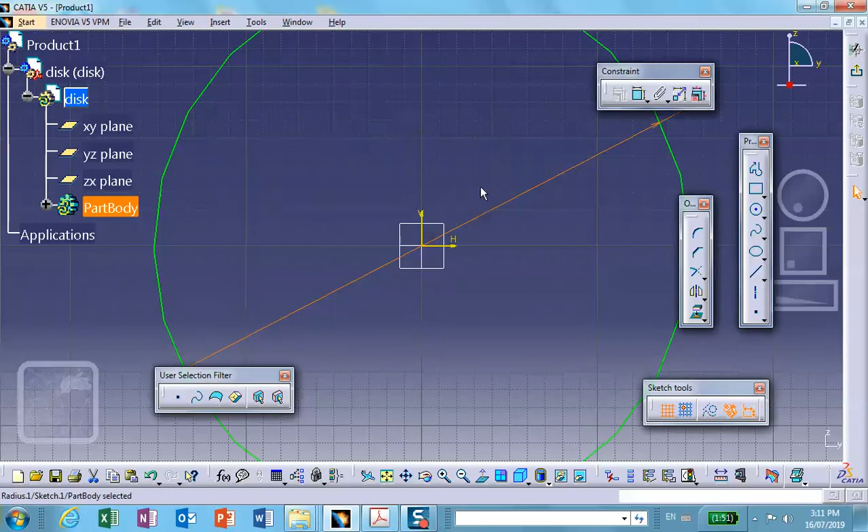And then we draw 3 circles here. This is the one in the center. The radius of all of these is 1. And another circle over there. And another one down here. We're going to position them in just a minute. Okay. And then this one is diameter 2. This one also, not that one. This one is also diameter 2. And so is this one. And let's put some dimension between the center of this and that line. That's going to be 6.

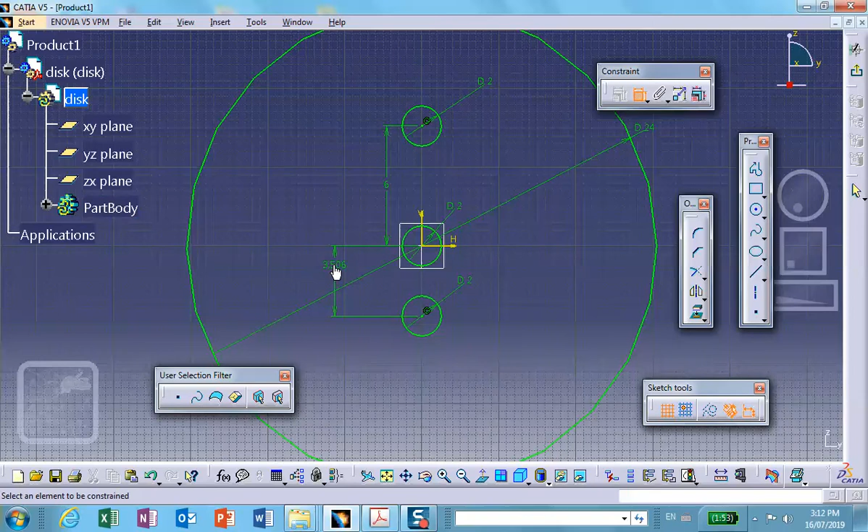Oh, I made a mistake. This diameter should have been 24 actually. Diameter is 24, radius is 12. Okay. Yeah, good. And then another one between the center of this circle and that guy is also 6. Okay, so this is supposedly that disc that you see there with 3 holes. So exit, pad it. The thickness you're told that it is 2 inches. So we make a mirror extent 1 inch in each direction, and that gives us what you want.

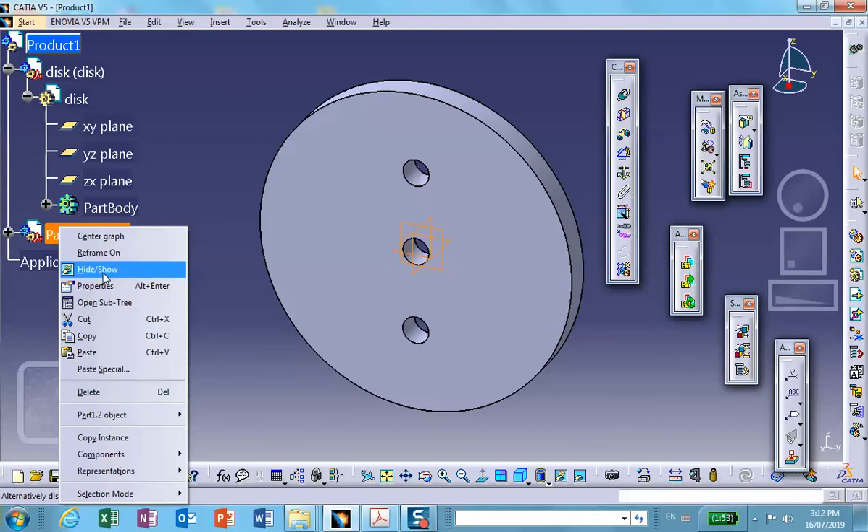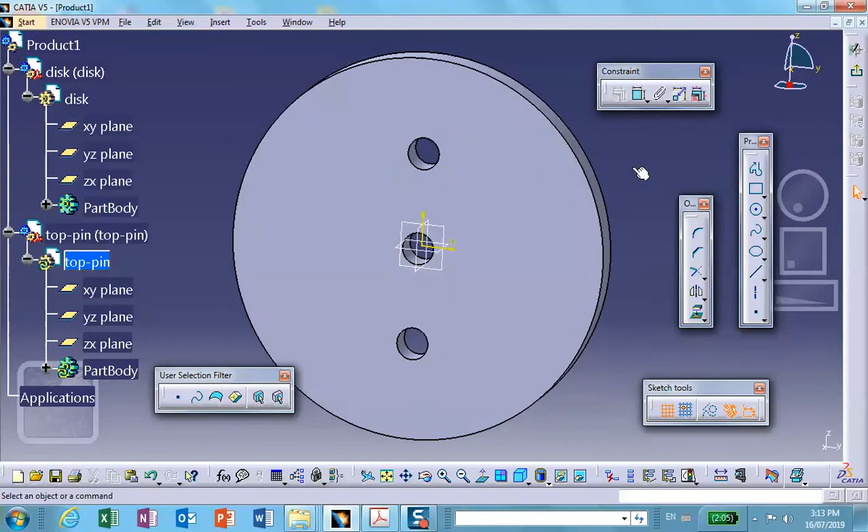Now I can insert a new part in there, and I'll call it the top pin. Right click, properties, top pin, and top pin. Okay, let's make it. So top pin, I'm going to project on that, let's see now, YZ plane. I will sketch, and project that circle. There we are. Exit, and then pad it symmetrically by 3 inches in each direction, so total of 6 inches. So that's 3 inches in each direction, and that's the top pin.

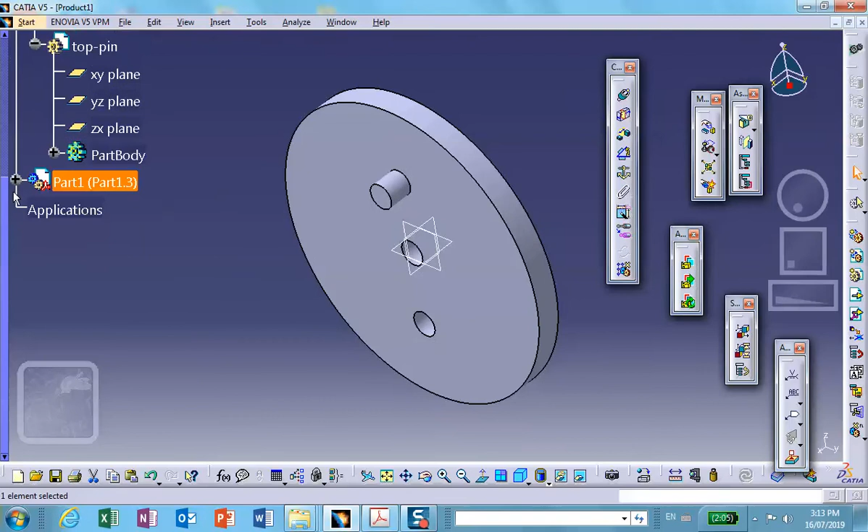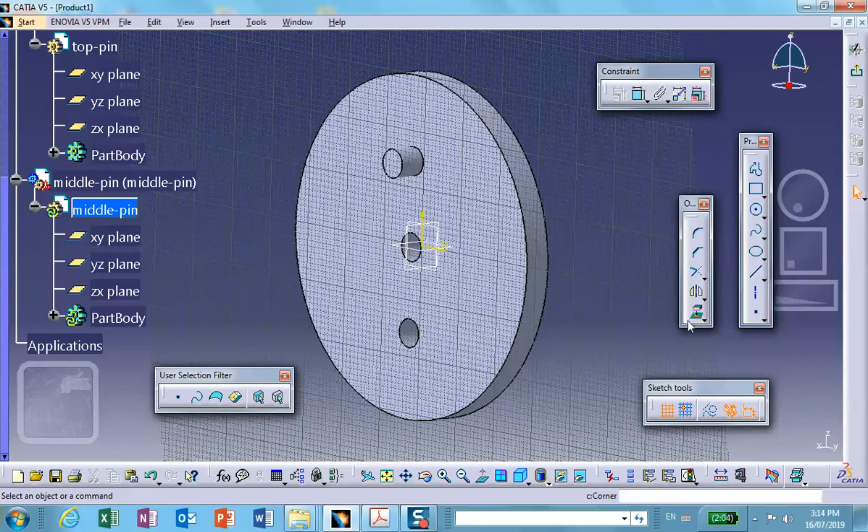Okay, now go back here, insert, new part. So no, of course you can use that pin by copying it, but I'd rather make it. Properties. I'm going to do the middle one, middle pin. Middle pin, and down here also middle pin. Okay, and make it. So go there on that same YZ plane. I will sketch. Repeat this process 3 times. This is ridiculous, but that's okay. Exit, pad it in each direction 3 inches,

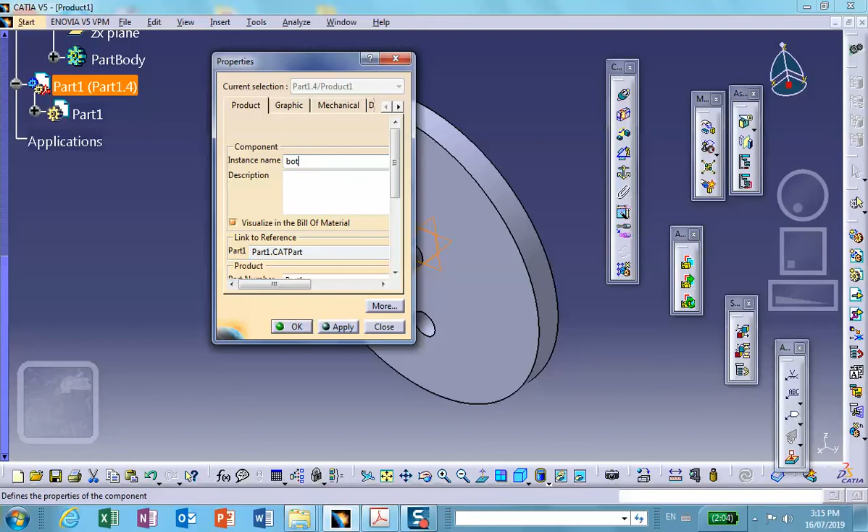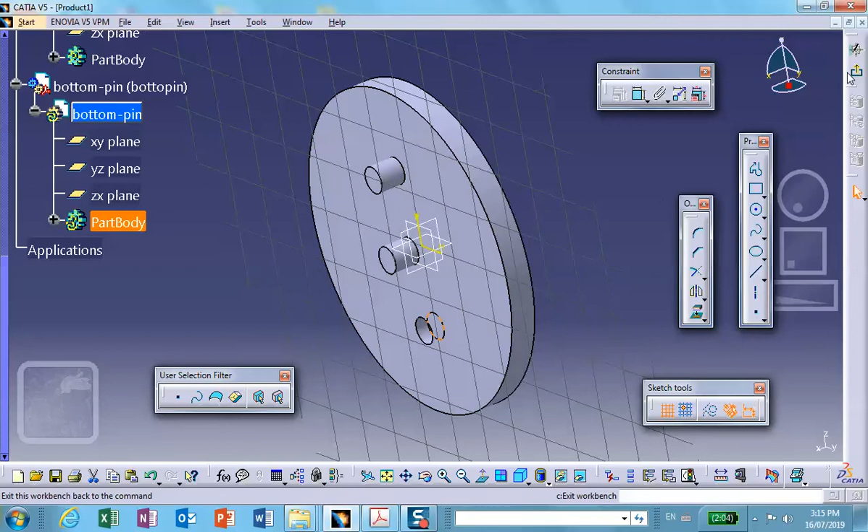and finally go up there, insert, new part, say no, and this is going to be the bottom pin. Right click, properties, bottom pin, and same thing down here, bottom pin. Okay, let's make it. So go in there on that YZ plane, sketch, project that circle, exit, pad it in both directions, 3 inches in each direction. So that's 6. Okay, let's go ahead and save this thing.

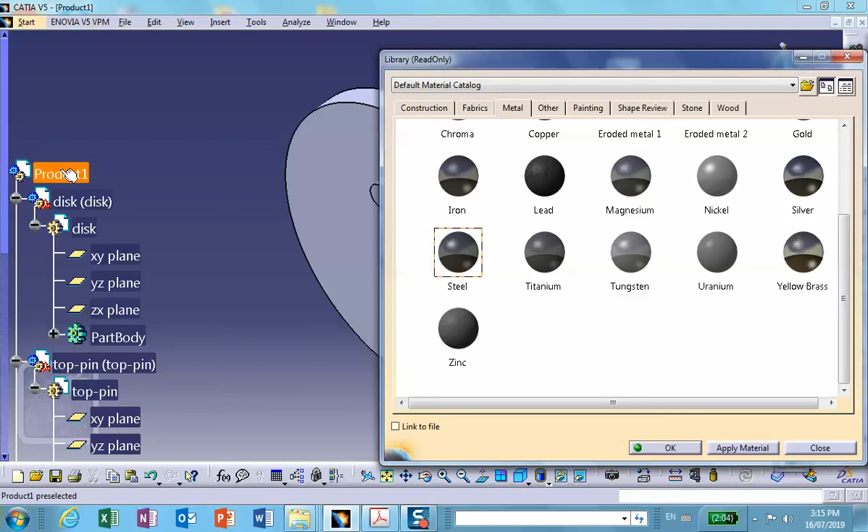By the way, this entire thing is made out of steel, so we go to assembly level. So apply material. Where is this? Apply material. Metal, steel, on the entire assembly. And okay. Now we're going to save this. File, save management, save as, desktop, new folder, assembly disk and pin. Disk, pin. Okay. And we say open and say OK, save and OK.

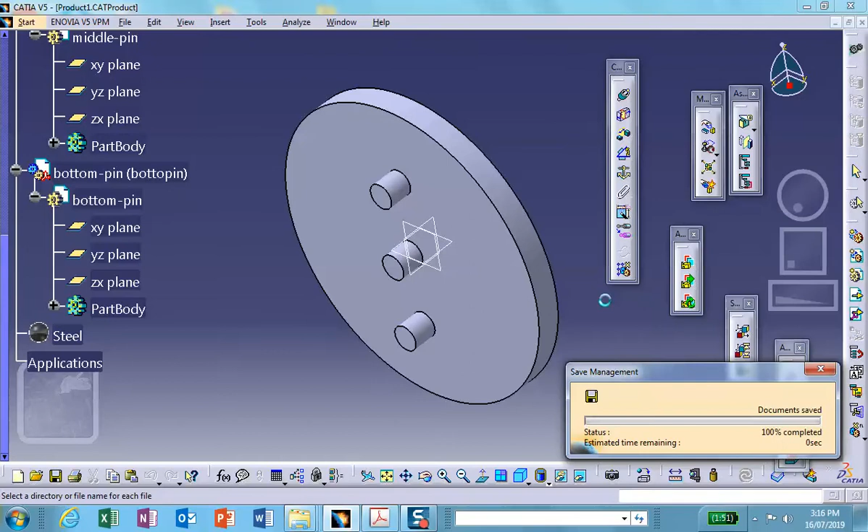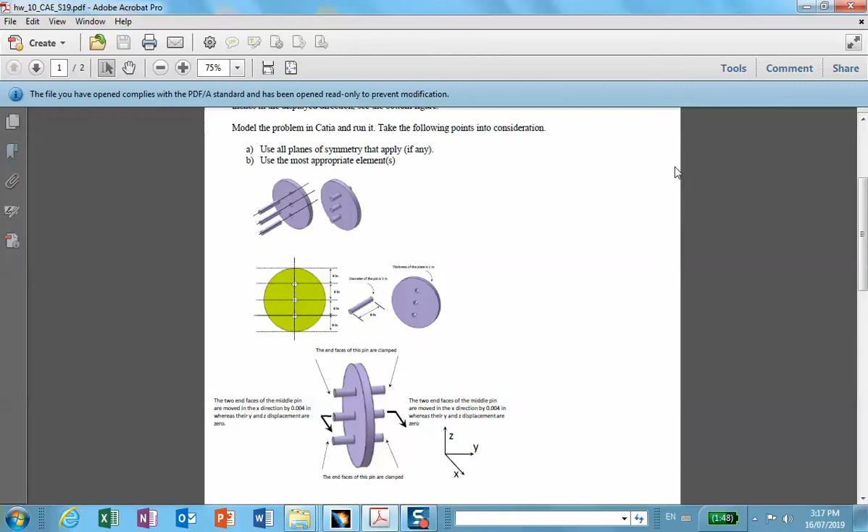Alright, now here's the situation. We are told that this top pin, the 2 ends are fixed, clamped, and the same thing with the bottom. And then we are taking the face here and the face on that side and pushing it in a certain direction, direction being direction X here, by some amount. Okay? So we obviously have planes of symmetry: both the YZ plane and the XY plane. See that? The amount of displacement is 0.004. Okay, so we have 2 planes of symmetry. Cutting it with the XY plane, and cutting it with the YZ plane.

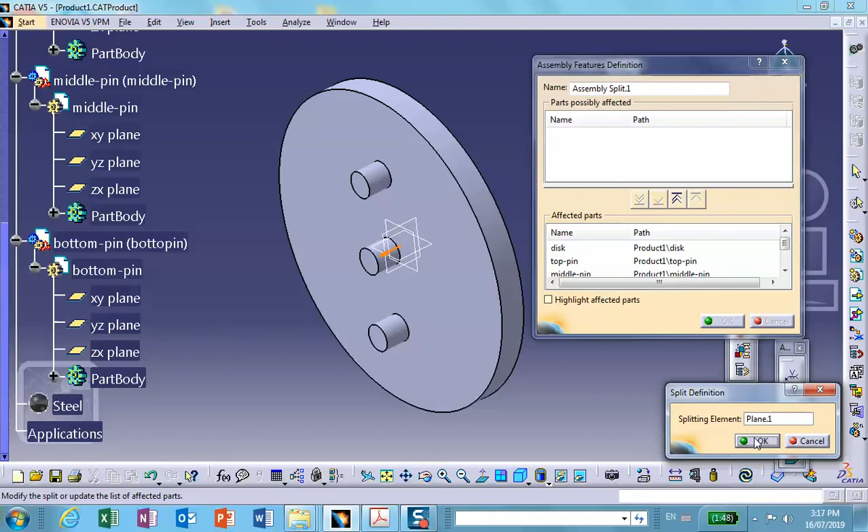Now we can do these simultaneously in the assembly while we're here. Click on the split, select the plane. It says these 4 parts are affected. Do you want all of them? The answer is yes. Which side do you want to keep? Okay, we keep that side. So this is the way it went. And then we also have to cut it with the XY plane.

Okay, so again the saw, split, this plane. It says these are all affected. Are you sure? The answer is yes. And if it doesn't work, of course you're going to fix it. So there we are. This is it. The top and the bottom behave exactly the same way. Alright, so let's save everything.

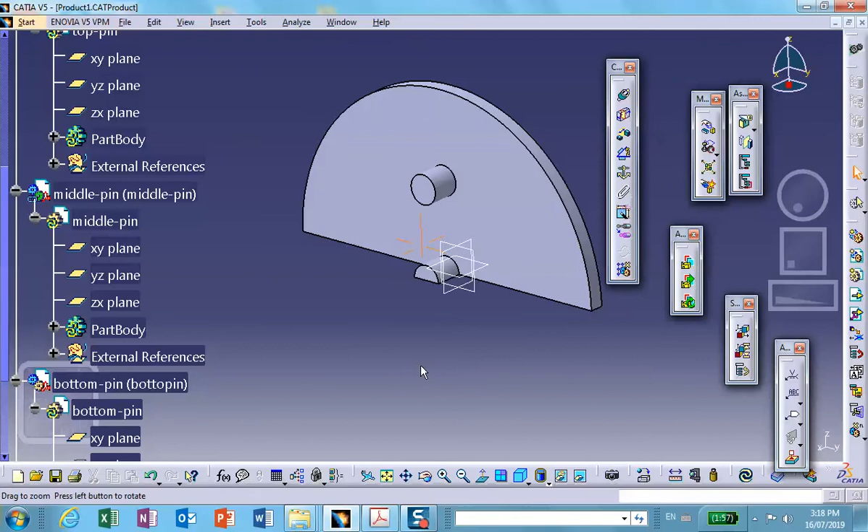Okay, we go to generative structure analysis. Catia immediately meshes these 3 parts. Now, of course, the disk itself is going to have a lot bigger element because of its size.

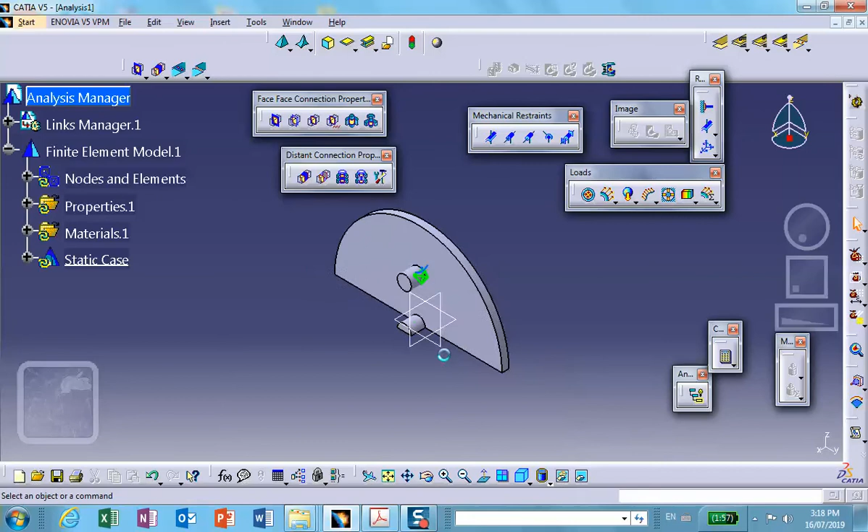I'm going to change that. Notice that this one is for the disk, I'll change this to be maybe 0.3 or 0.2, we'll see how it works. For the top pin, I'll make it 0.2 so you can see it better. The bottom one, let me make it 0.25. How about that, because I can't see it. Here 0.25, and this one 0.25. Okay, very good. So let's look at the mesh now.

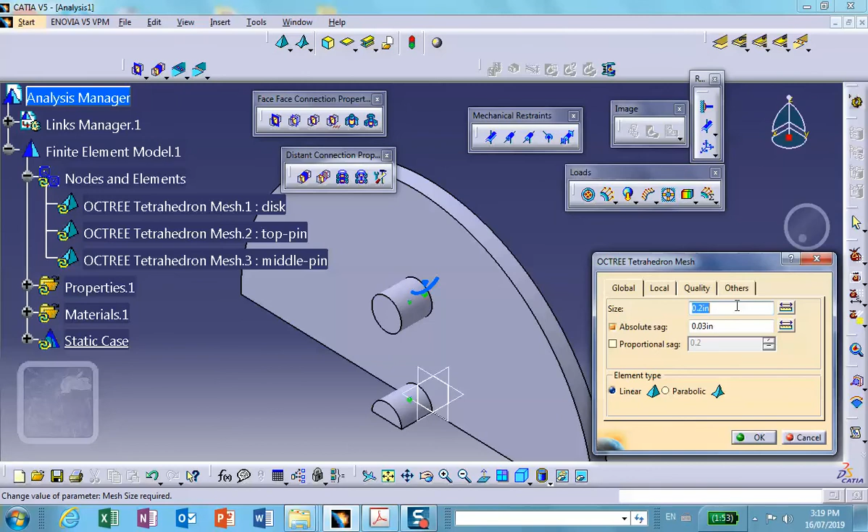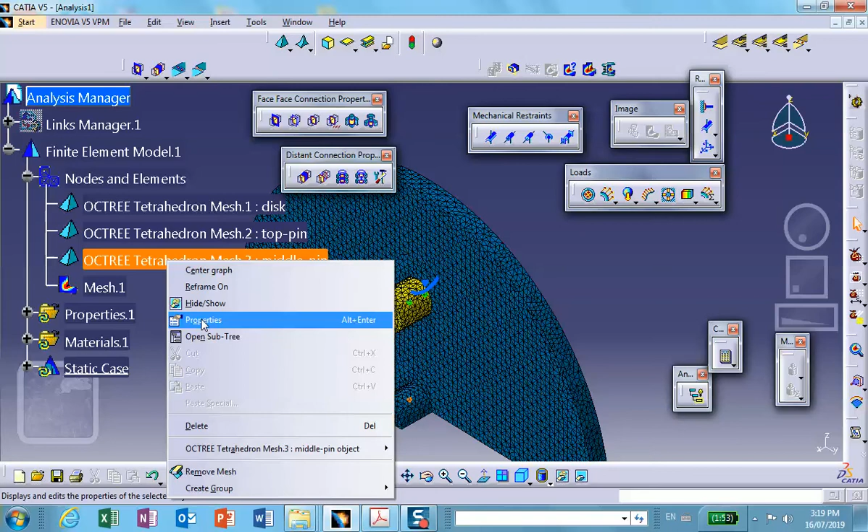Right-click Mesh Visualization. There we are. If you want different colors, go to Properties, Graphics. For example, for the pin, I'm going to make it yellow, and also for the other pin yellow. Properties, where the disk itself is kept at blue. I think these are too small, but our problems are simple, so we just leave it like this.

Okay, fine. Now deactivate that, and let's start putting our restraints. So this end is clamped.

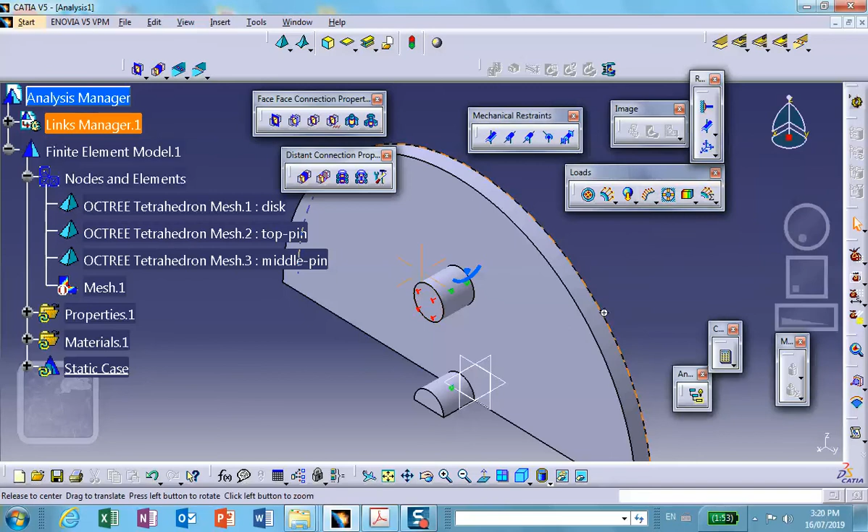Let's put our surface sliders here, planes of symmetry. This is a plane of symmetry, that is a plane of symmetry, and that is a plane of symmetry. And incidentally, this is a plane of symmetry, so is this, and so is that. So we took care of all planes of symmetry, no problem.

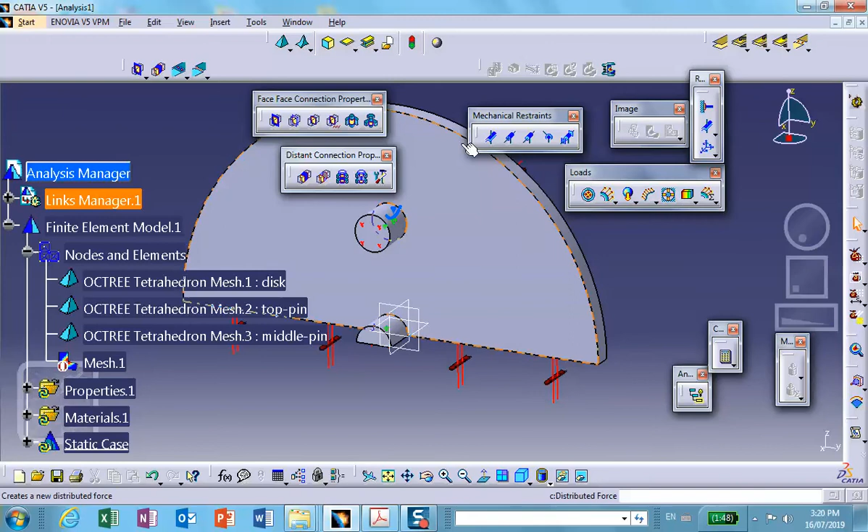Now we want to take this pin and push it in the y direction by 0.004 according to what the problem says. So we do a user defined restraint on that face, in the direction y. First you make it 0, and that's what this does, then you can change it. So enforce displacement on that restraint in the direction y, 0.004. I think that's what the problem says.

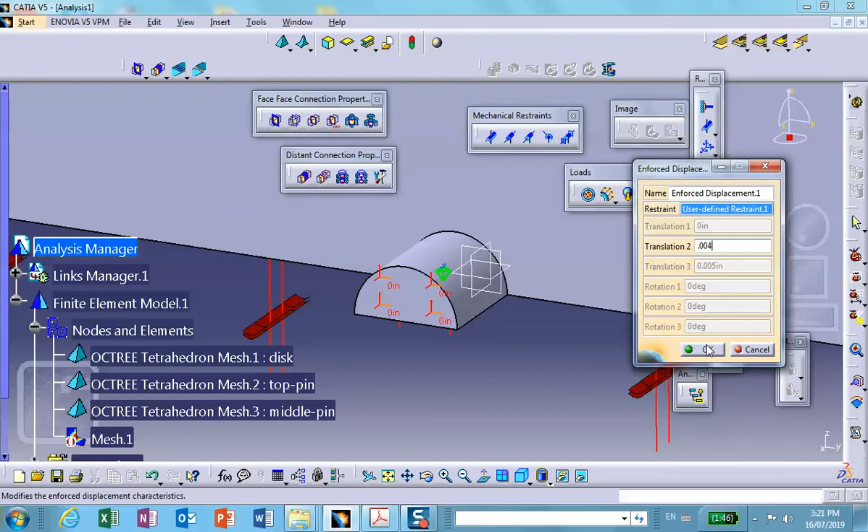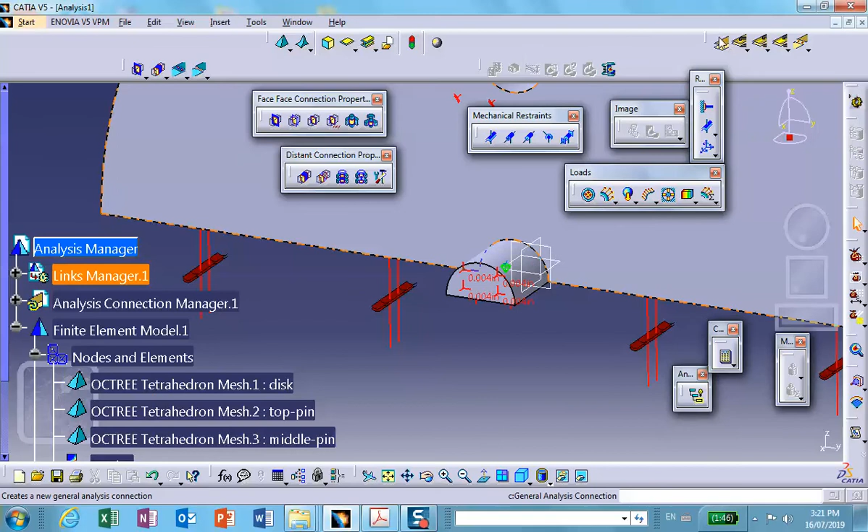Okay, now before we run the problem, we have to create connections between these. So we create contact connections, which we discussed in class. For the first component, the surface of this pin. For the second component, I'm going to hide this pin and select the surface of the hole. And this is going to be contact. I do another connection, surface of this pin, and for the second component, hide this and select the surface of the hole. Also contact. Now what we have here is the contact.

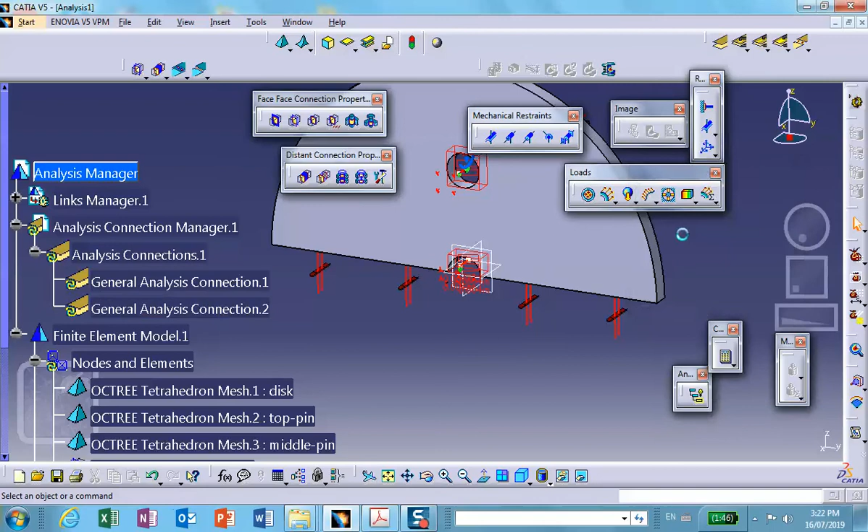Let's go ahead and do that. So where is the contact connection? Right there, in the face-to-face connection properties toolbar. So this is contact, and once again, this is contact. Don't fool around with clearance and friction and things like that, please. Let's bring these pins into the show mode, although that's not necessary, and we can go ahead and run the problem.

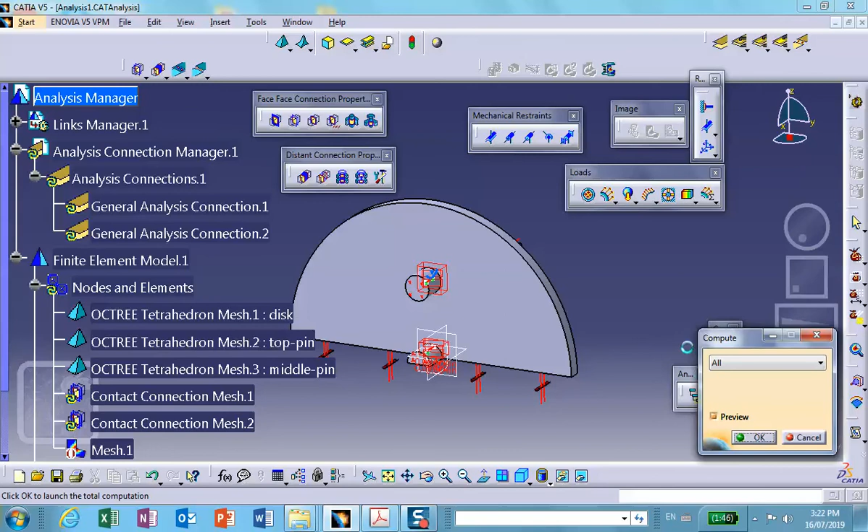Save the analysis: file, save management, save in the same folder, which was assembly of disk and pin. Run it. Ignore the warning. And that's it, so let us look at our deformation and animate it. If you want to see it bigger, exaggerated more so you can see it better, let's not use 252, the default. Let me use 400. Maybe more, 800. Okay.

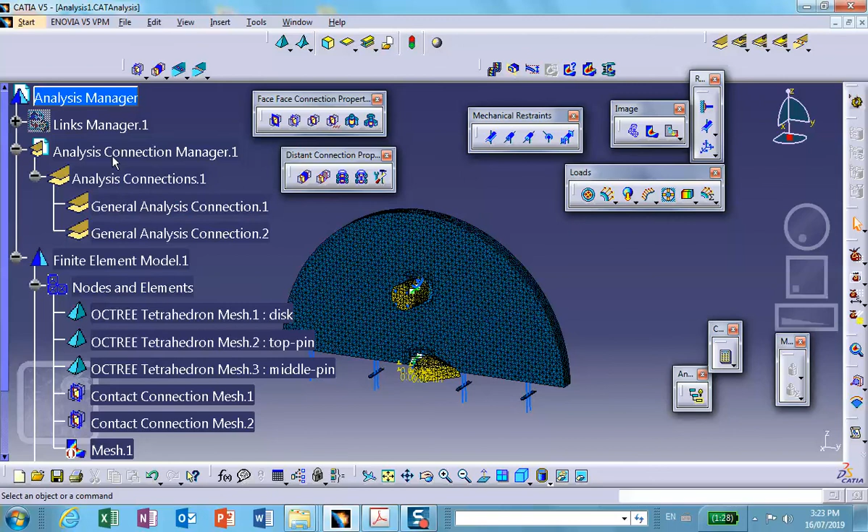Actually, let me clear all these things that we don't want. Hide this, hide the mesh. Oh, not this, not the mesh. Hide these things. Hide. Let's hide all the restraints, all the properties. Let's hide the restraints and the load.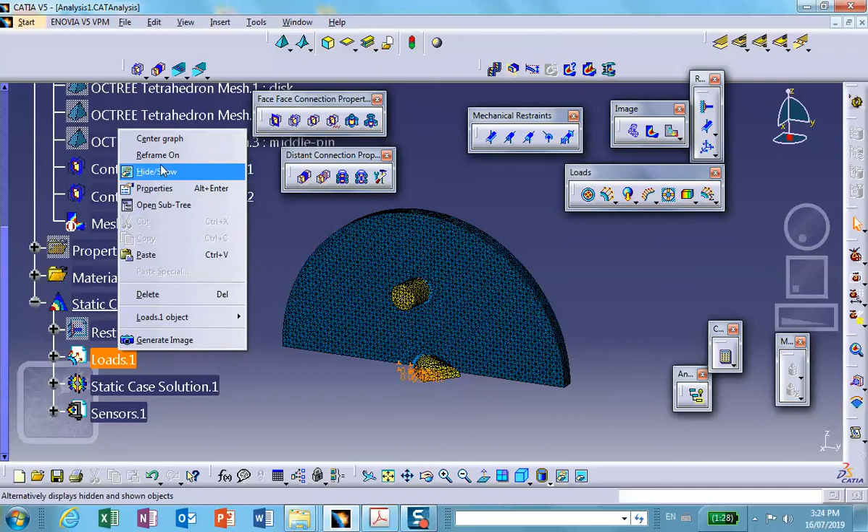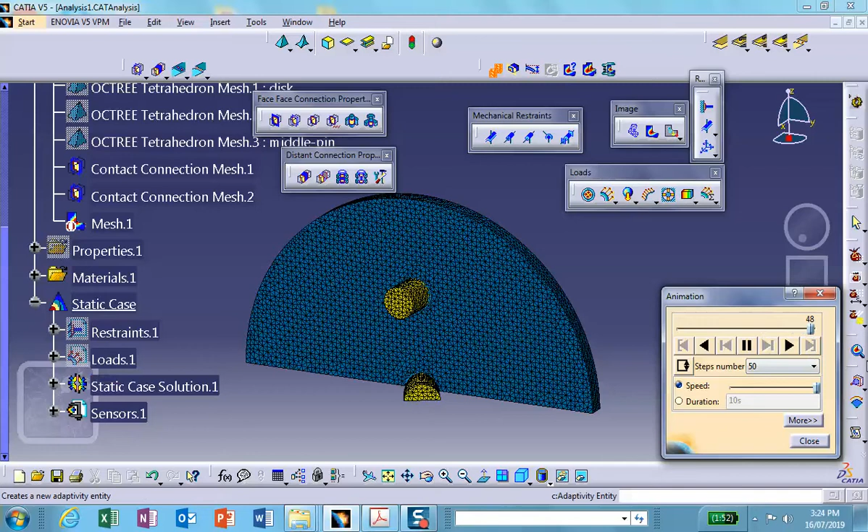Okay, now here's what we did. This was too much of an exaggeration, so let's put it back to 400. Good, and we can animate it. You see that it works fine. In other words, the top pin was clamped, this bottom one is pushed in the Y direction by the amount given. If you look at the displacement, change it to average ISO, change the rendering to material shading, you can see that.

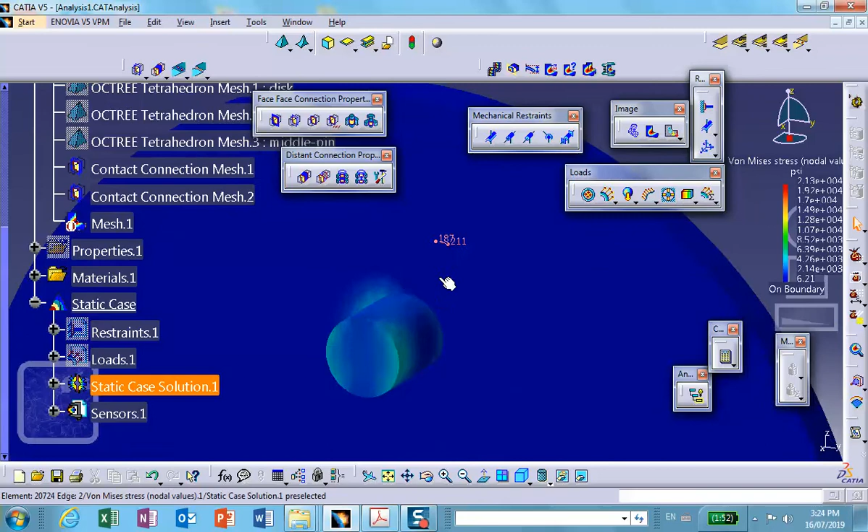And if you want to look at the stress, von Mises stress, obviously the biggest stress is going to be in this area, both maybe due to bending, maybe due to the fact that this is pushing on that.

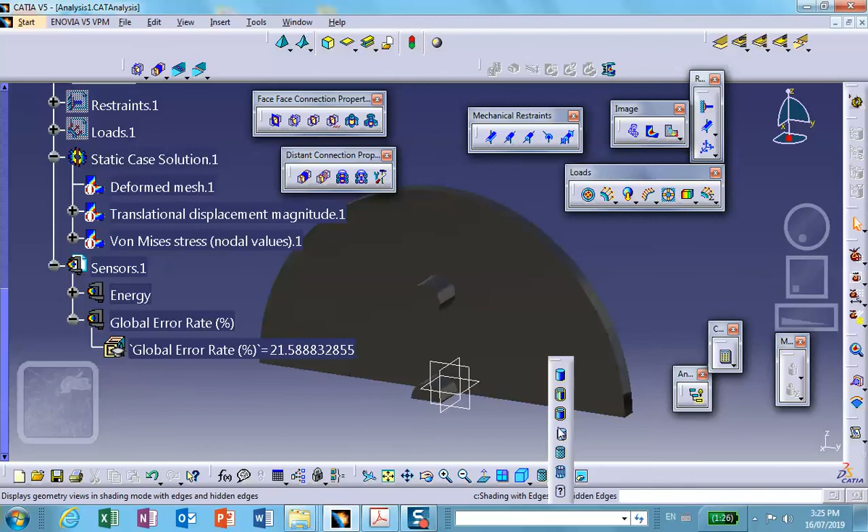I think in the question you're being asked how much force is needed to cause this displacement. So what you do is, first deactivate this plot. Let me change the rendering here, I don't like this material shading rendering. Right click, resultant sensor, reaction sensor, and select the restraint that you put in pushing this. So right here, I think this was that guy, okay. Then update result, and you get roughly almost 4,000 pounds.

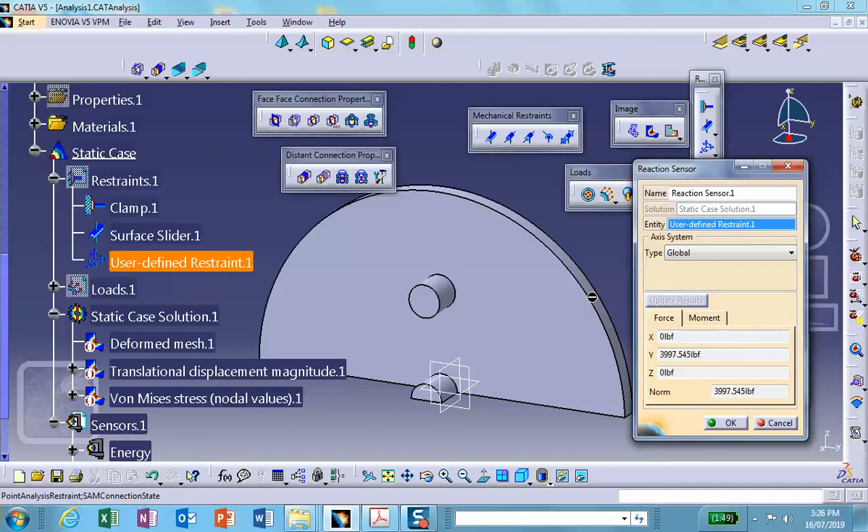Now remember, you have to get the actual force needed for creating the deformation, because this is for half of the model. If you want the actual one, you need double of that on this side, 4,000 on this side and 4,000 on the other side. That's a lot of force, but remember this is a piece of steel 2 inches thick, so it doesn't surprise you. So the answer to this problem is actually this thing times 4, not times 2, because you have the top and the bottom, that means you double this, but there's the other side, which is another double, so that's times 4. That's pretty much it.